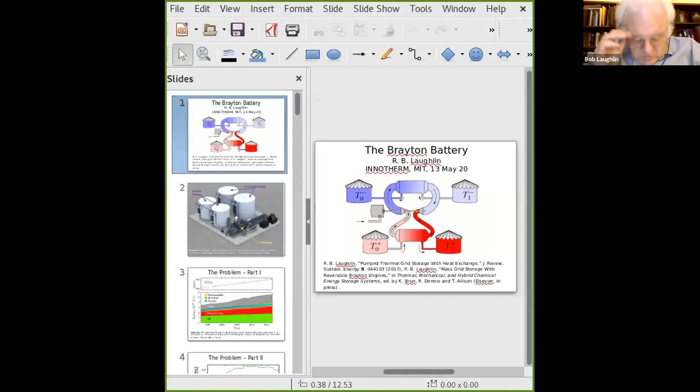Okay, so we're sharing here. Share. Okay, have we got signal? My own voice is not coming to me. So, Craig, you can communicate with me with hand signal. I can hear you, yes. Okay, yeah, we can hear you fine, Bob. I can't hear myself. Okay, great.

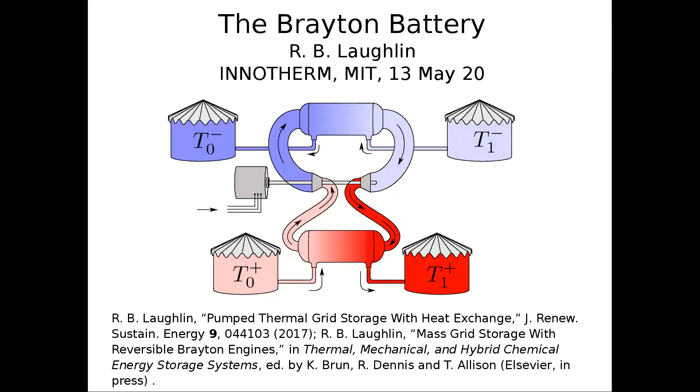I'm going to talk today about what's on the screen here. There are two relevant publications you see at the bottom. One is in press, the other has been out for a couple of years. Before I get deeply into this, I want to note that the publication date on the first one is 2017, but that paper was actually written in 2013, and it was embargoed. That whole question of privacy and secrecy and embargoing is actually very relevant to the bigger question we're talking about this morning.

So I'm going to talk to you about technological things having to do with how to store energy on the grid cheaply, in enough mass to have an effect on the economics of wind.

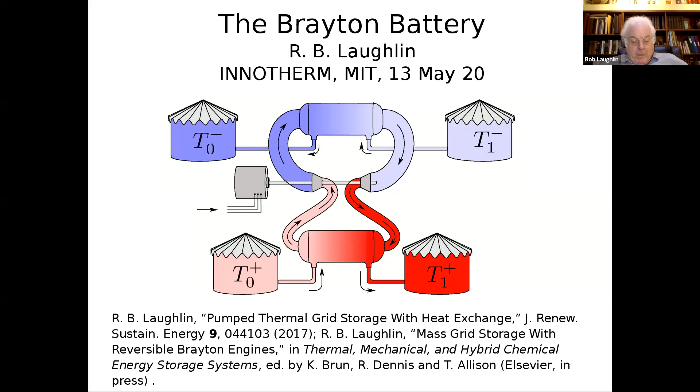This little item is an example of what it might look like. This is drawn courtesy of Brayton Energy LLC up in New Hampshire. I don't want to talk a great deal about it, other than to say this picture came out in 2017, which is not an accident. You'll see that yellow thing says heat pump—that's the engine. This particular version is bigger than it ought to be. The actual engine doing the conversion of energy is actually very small, and is separate from whatever is storing the energy. That separation between the engine and the storage medium is actually critical for the economics.

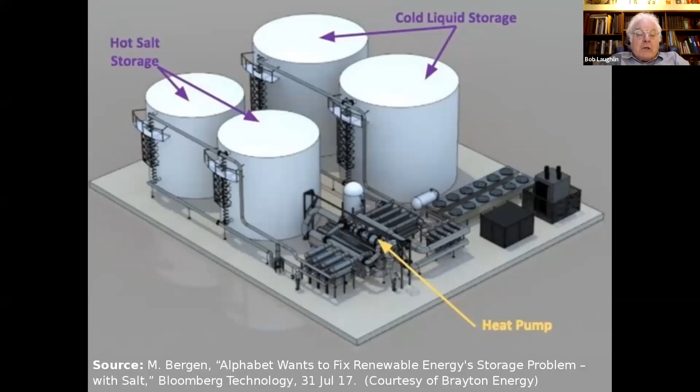Now let's begin by talking about what I call the problem. I'd like everybody to look at the bottom figure. That is the world energy budget in joules per year as a function of time, from the BP statistical review, converted from tons of oil equivalent by the usual factor. The key things to note are, first, that the total growth is monotonically upwards.

Secondly, the total renewable budget is that little yellow sliver there—that's all of wind and sun. Plus, it turns out it also includes corn ethanol, and that's important because the energy economics of corn ethanol is very problematic because of the diesel used in growing the corn. So actually, the renewable situation is even worse than that yellow sliver shows.

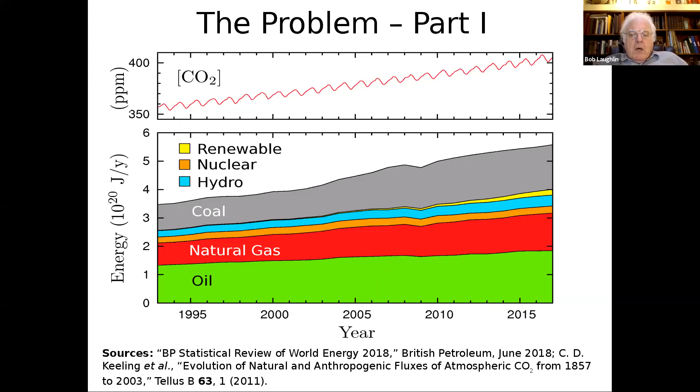So that means the Keeling curve is missing about half the carbon budget out of the Earth, and presumably that's going into the oceans, although you don't have direct proof of that. All right, so that's the energy carbon situation.

Now we get to electricity, wind, and this is what I call the problem part 2. This is a plot of the power budget of the state of California, the California ISO, as a function of time over 24 hours in some day in 2009. What you see here are 3 curves. The gray curve down there is a prediction made 3 days ahead of what the demand will be. The red curve is a snapshot of what the demand is in real time. You see it matches the curve pretty well. And then the green curve at the top is reserves.

So the reality of electricity today is that electricity travels at the speed of light and is not storable. So power companies make their business by anticipating what demand will be and then switching on generation assets onto the grid in time to meet that demand. And that's so sensitive that they have to have extra on hand just in case their theory's wrong.

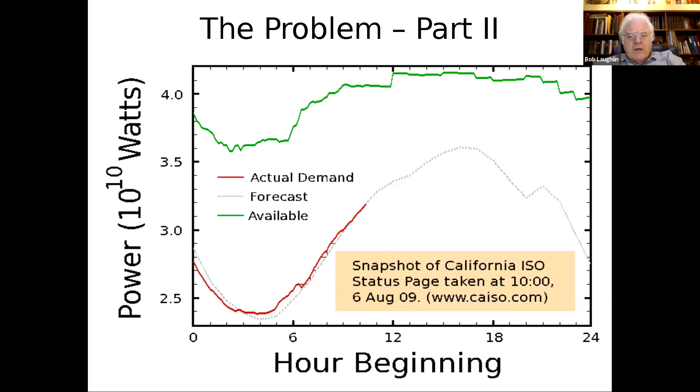Notice the magnitude of the slosh there is about 30%. Call it 20 - okay, it's because of where 0 is on the y-axis. So what I call the diurnal surge is about 20% for the electric grid between low use in the early morning and high use at rush hour.

As a result, wind assets often have negative value. This has happened in numerous parts of the world: West Texas, parts of Europe, definitely in China. The wind energy comes when it wants, and the fundamental problem here is that the power industry is all based on time. Power that comes when you don't need it is useless to the industry because the industry is busy switching on assets to balance the load. So negative value means the power is worthless - it's worse than worthless, you have to pay the grid to take your power. So this is telling you there's a business problem that's fundamental and has at its root the physical reality that electricity can't be stored.

Now you say, well, why not store it? There's a really interesting fact about the United States, which is that it has a huge amount of pumped hydro storage available, particularly in the Appalachians. And these are 2007 numbers. The amount of pumped hydro storage you have down at the bottom, that red 0.25, is 1/4 of the amount you would need to level the entire diurnal load of the surge load of the country.

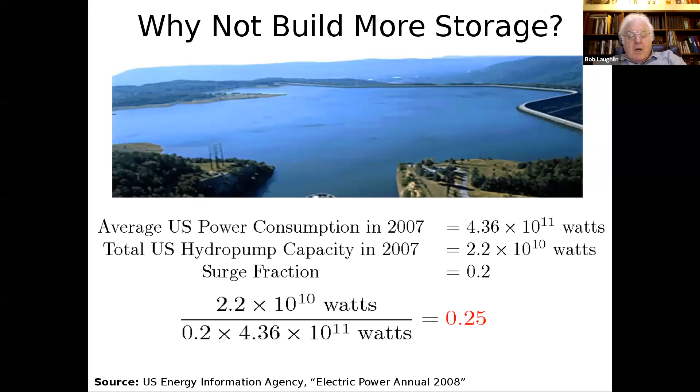So this was built chiefly in the 70s and 80s, and you might ask, well, just why not build more? Clearly, if you build 1/4 of it, you could build the rest. Well, that's part of the story. One reason, the lesser important reason, is that there's a danger factor.

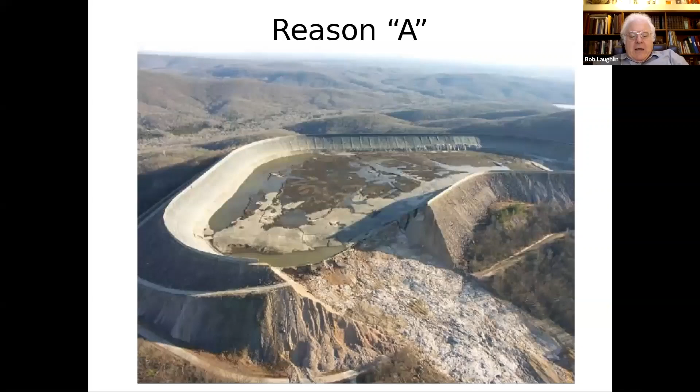This is a picture of the famous Taum Sauk breach, where - well, I think the picture is self-explanatory. The reservoir failed and there was massive destruction downstream of it. But the more important lesson is that the amount of energy we are talking about storing up the surge for a metropolitan area is an immense amount of energy. It's equivalent to a really hefty sized nuclear bomb. So that means when you're thinking about energy storage as a safety issue, it must be physically impossible for all that energy to come out at once, or you risk destroying the city.

So for example, storing all that energy in compressed air above the ground is kind of a non-starter. All it would take is one terrorist bazooka round lobbed into the middle of the tank farm and no more city.

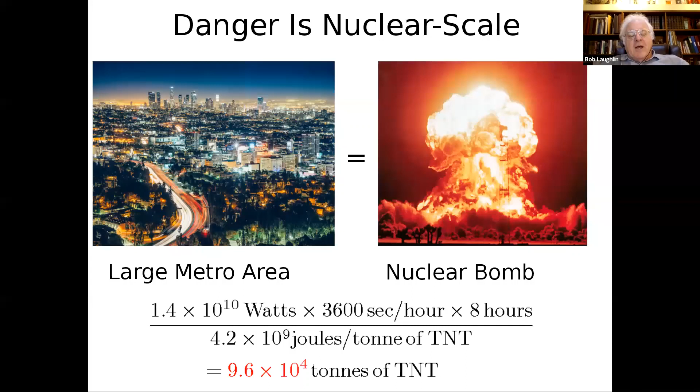The much more relevant reason is this: in the late 1980s, aeroderivative gas turbines got to be very, very good. And the power industry discovered it could handle that surge much more readily by buying cheap gas turbine generators, simple cycle gas turbine generators, and just switching them in and out of the grid as the needs of the load required. And this is the way it's done today.

So when this technology came on board, construction of pumped hydro stopped. In other words, what stopped the construction of the remaining 3/4 of the pumped hydro you would need to level the load is economics. Basically, the gas turbines were cheaper, there was no hassle with the government over land and no water to deal with, and they're faster. So there's a technical/cost issue right at the breaking point of where power companies make their profits.

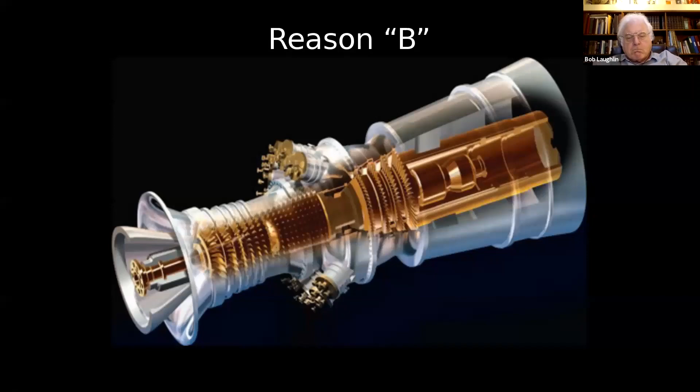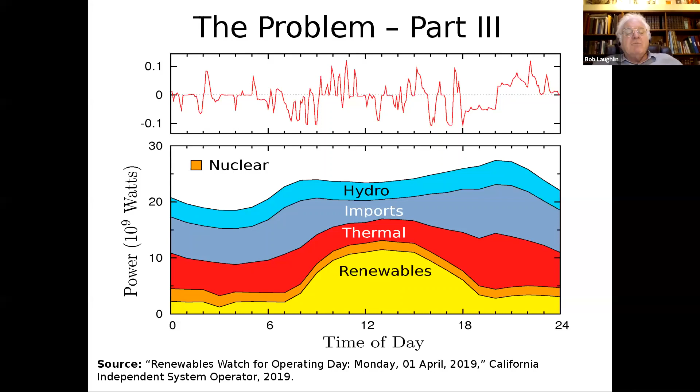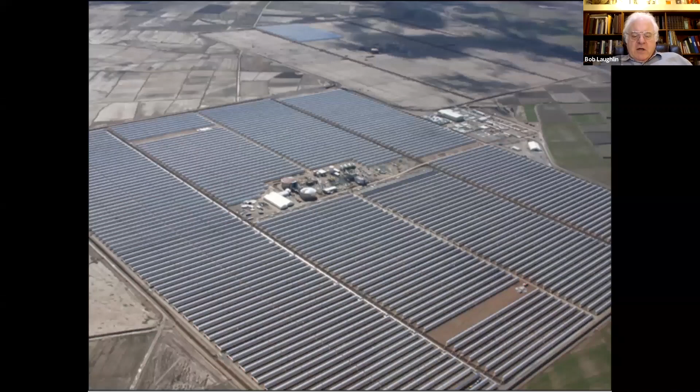Here's a close-up of it. What I want you to do now is focus in on the center there, and in particular those two brown tanks. The center is where the engine is for this solar farm. And there it is. You see in the background we have parabolic reflector collectors, and in the foreground there are two tanks, and these tanks are filled with molten nitrate eutectic where heat is stored. So Andasol 1 was the first commercial plant that stored heat, energy in the form of heat collected from parabolic fields, in molten salt.

Now, this was not the first deployment of molten salt storage. That first deployment was at Solar 2 in Barstow, California, but this was the first commercial one. And because it was commercial, there was a lot of buzz in the finance markets about what the costs were. And because of this buzz, you can go back and look and verify what the costs were, and see that they're actually remarkably reasonable. The fact that the plant was built also proves this, but let's just say there's more evidence than just that it was first.

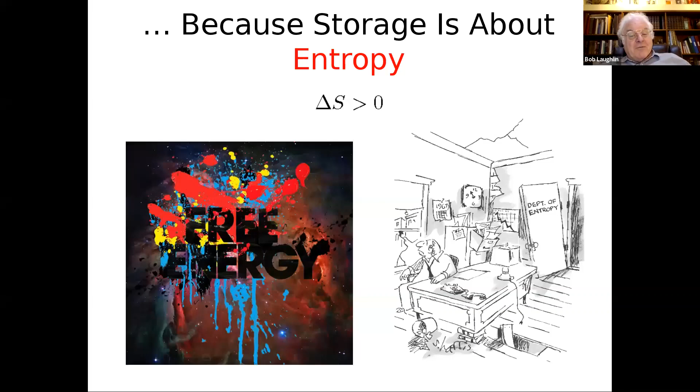Now, the key observation here is that modern gas turbine technology has become very good, and gas turbines are basically just a bunch of fans. Disregarding the burning of fuel for a moment, the actual compression and expansion that occurs in modern gas turbines is very, very efficient. They make shockingly little entropy, and therefore you can imagine running them backwards. This is running them backwards figuratively. There are blade shape issues that you have to worry about, which I'll come back to later. But insofar as there isn't any entropy being made, you can simply run the movie backwards. So you're producing energy, you stop the projector, run it backwards, and you're storing.

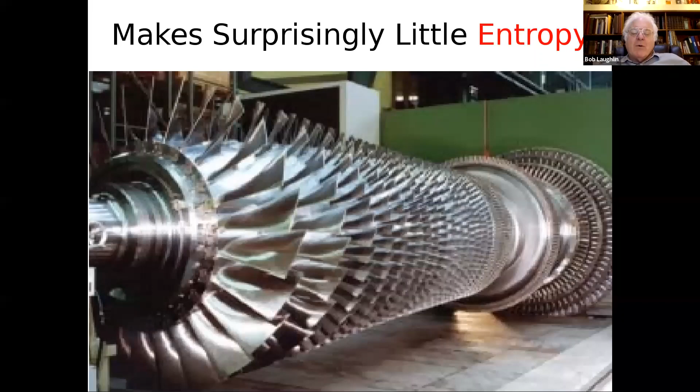Now, let me remind everybody about a few basics of gas turbines. Here you've got a jet engine, some air is coming in, there's some fire, air is going out, and you get power out. Then you ask the question, well, how come energy is coming out? What's the difference between the compressor and the turbine?

Turns out very few physicists know the answer to this, so I'll tell you. It's the temperature difference. So the key trick is that it's much hotter at one end of the chamber than the other. The work done in the turbo machinery is PDV, it's the DV, the volume is different on the two sides. So the trick is you keep the temperature unbalanced and then maintain that temperature imbalance with a stupendous flow of moles of gas through the turbine.

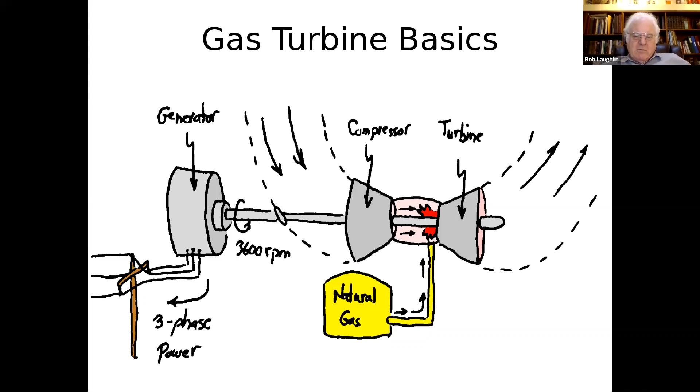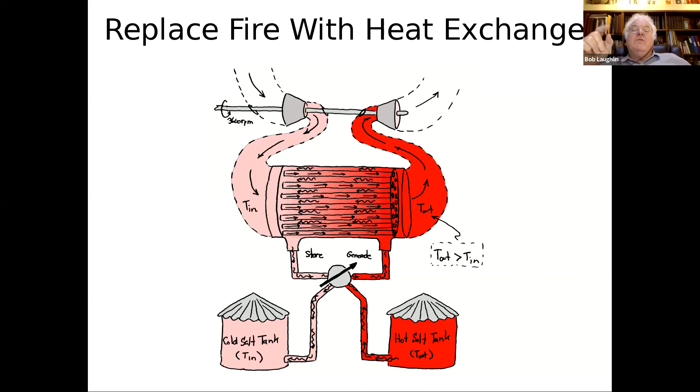Now let's advance a little bit and get rid of the flame, and put instead the moral equivalent of a locomotive boiler in there. Then do exchange with some sort of heat fluid. As far as the turbines are concerned, nothing has changed, they work exactly the same way. But now you have heat being transferred inside a heat exchanger such that the temperature difference over which it's transferred is very small. And if you do that properly, you can cause the amount of entropy made to be very small.

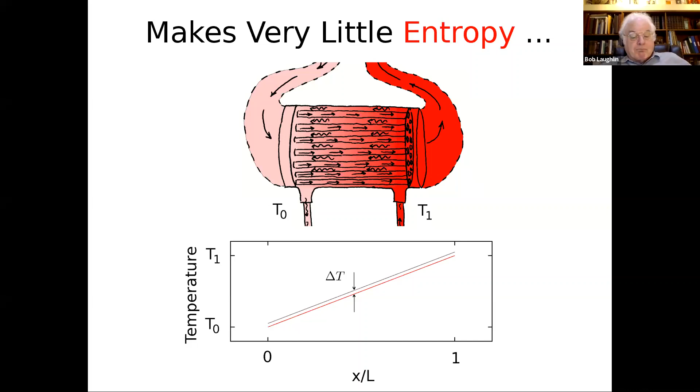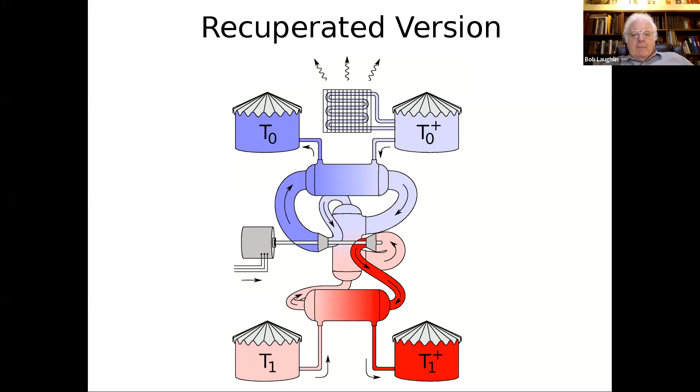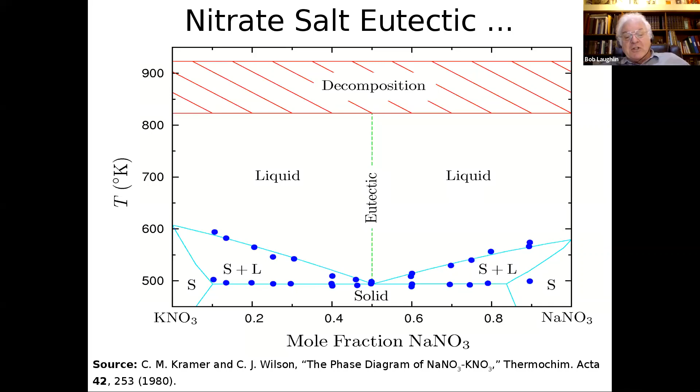Now, it turns out that the storage medium deployed in the Spanish solar plants is fabulous. I'd like to call your attention to that vertical green line there. That's the temperature range over which it works. And it turns out that that temperature range is large enough that phase transitions don't matter. In other words, equipartition is guaranteeing that the amount of heat stored per atom is very large. And in fact, you don't want phase transitions to occur here because they're entropy makers. So this is an application where phase transitions in the medium would actually be bad.

This temperature range turns out to coincide exactly with what's called the creep cliff of the steels in question. And this means that there's a fundamental compatibility with the engines. This compatibility is also manifested in modern day supercritical steam plants, which is why they have the temperature ranges they do. So the temperature scales of these salts turn out to be just perfectly adjusted for cheapness and compatibility with materials.

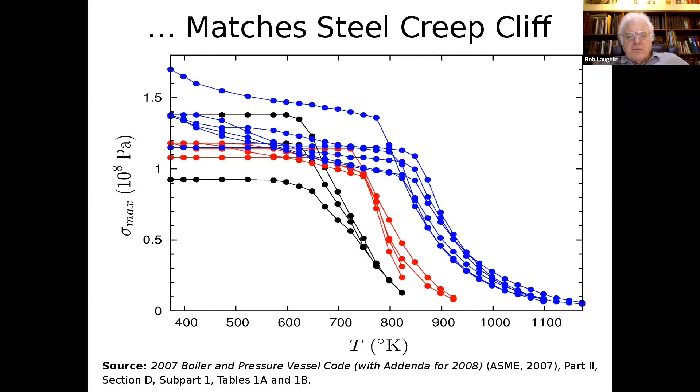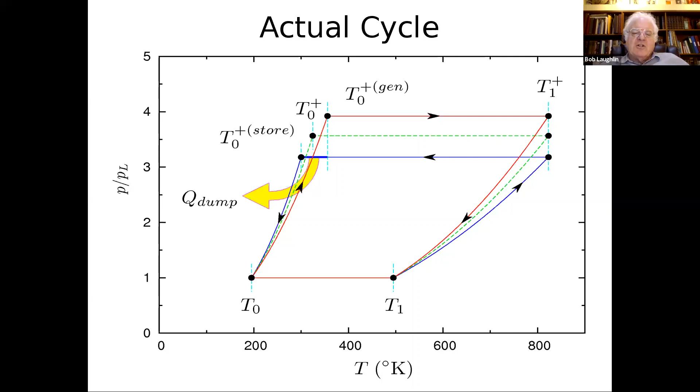Okay, so with the extant gas turbine blade technology that one has today, we're talking about an asymptotic round trip efficiency of about 0.7. That is enough to make money.

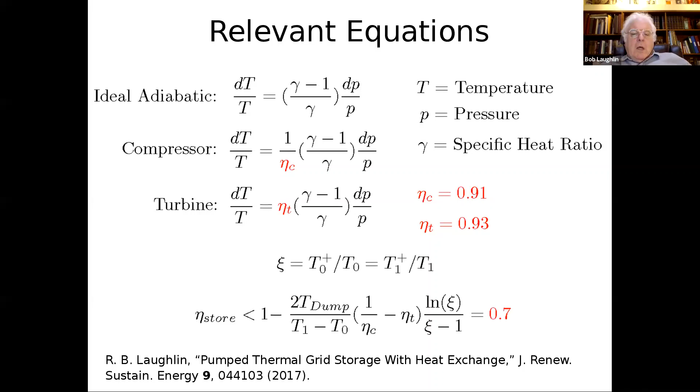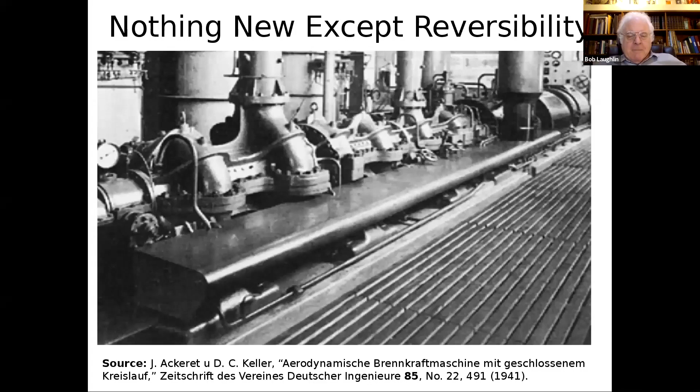So you ask, what do you have to do to solve this problem? Well, what you have to do is get a whole mess of patents, so the money people can put their money down. So this particular technology I am banking on, because it does what you need with the efficiency you need, with the economics you need.

So we don't have a siting problem. You don't have to put the compressed air underground in caverns. Why? Well, because this technology is compressed air energy storage, except you do a secondary expansion first, so you don't have to put the compressed air underground. And anyway, we all know when you compress a gas, the energy is actually stored in its heat. So there are heat issues with caverns that you just get rid of when you don't have the underground cavern.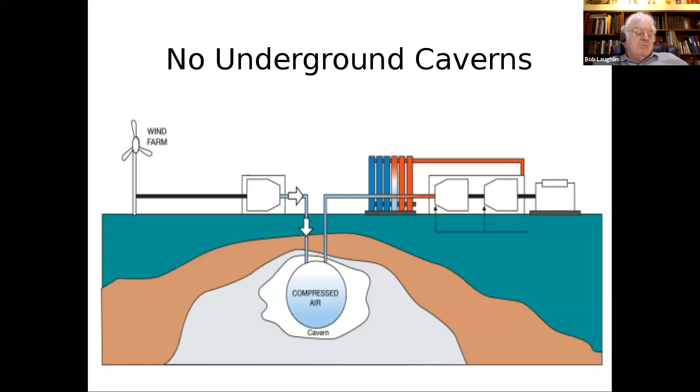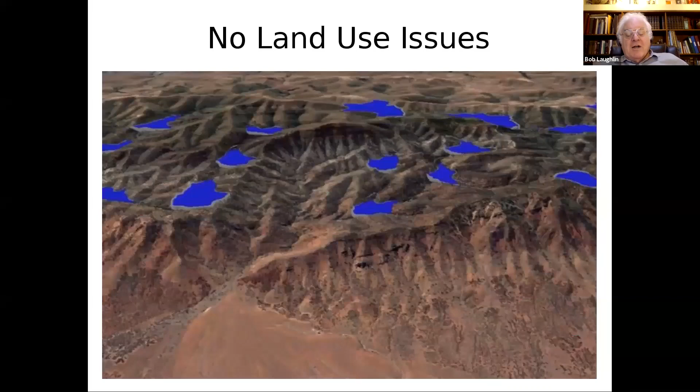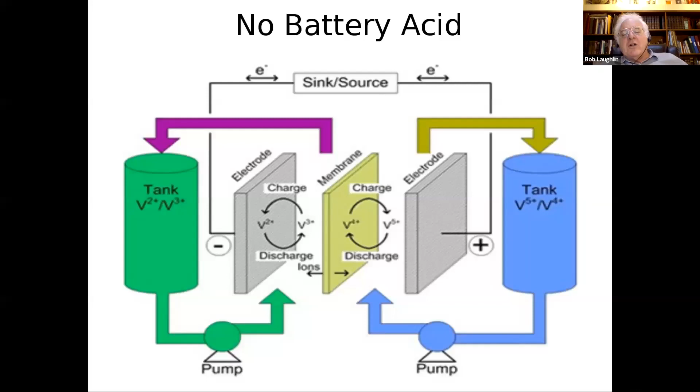Because everything is at 1 bar, explosion is physically impossible. So the atomic bomb danger of energy is gone. All the problem of using public lands goes away because you don't have to make lakes. The footprint of the technology is quite small. Environmentally, you're in good shape. You don't have any pH2 stuff in giant tanks. You have just a bunch of salt, and if there's a breach, what happens is fertilizer goes all over the ground. And finally, no semiconductors.

So as I said, I'm a semiconductor man, and I understand the physics of what's going on with the grid well enough that I know that you don't want semiconductors. The grid is set up for mechanical motion, like these horses, except it's electrical mechanical motion. And so faking it with semiconductors is actually bad and results in losses. So we get rid of the semiconductors and we're back to good old mechanical grid.

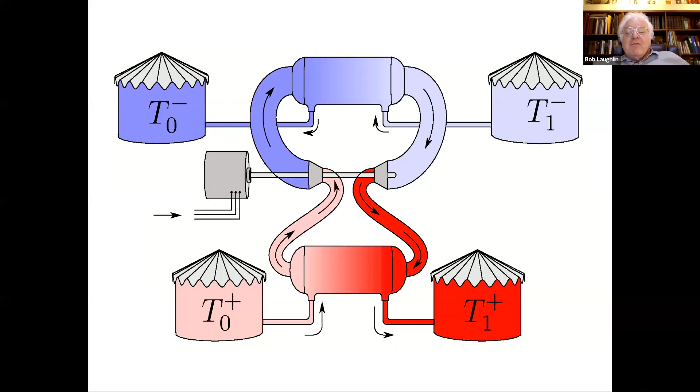We're done, and I'm on time, everybody. Thank you for your patience. I hope you were entertained.

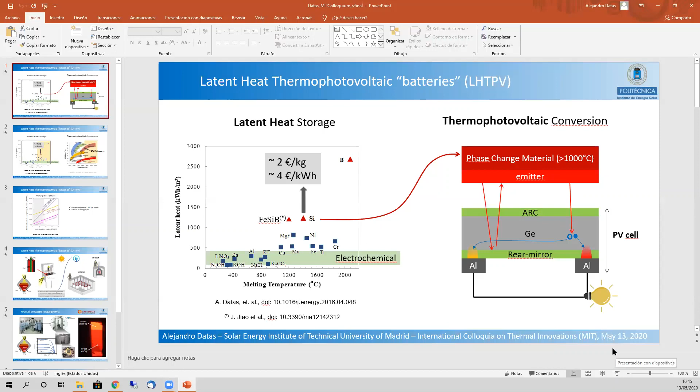I've got a couple slides, I think, Alejandro, and a summary of what you're working on. Yeah, so you're going to share slides, or I should? Do you want me to show the slides? No, okay, I will go for it. Yeah, share your screen to be easier. Okay. Okay, good, I hope everyone can see this screen. Yes, okay, perfect. Okay, so thank you very much for the introduction.

I will briefly, in just 5 minutes, introduce this concept of what I call the latent heat thermophotovoltaic battery. As the name says, it has mainly two parts: latent heat storage and thermophotovoltaic conversion.

For the storage part, I want to emphasize the role of the phase change material, which basically stores energy when it changes from solid to liquid phase. Here I show the latent heat of these materials as a function of melting temperature. You want a high latent heat because this means high energy density capacity. What you can see here is that generally when you increase the melting temperature, you also increase the latent heat, so the energy density capacity.

With some exceptional cases, like silicon or boron, or even this new phase change material that is an alloy of iron, silicon, and boron, they provide remarkably high latent heats. That's basically twice the energy density of electrochemical batteries, illustrated by this bar. Besides that, you have a very low cost because it's just metals. In the case of silicon, for instance, you have two euros per kilogram, which translates to €4 per kilowatt hour. So it's really a good way of storing energy.

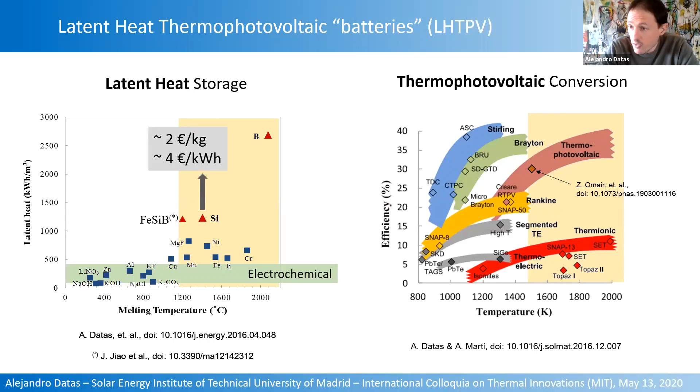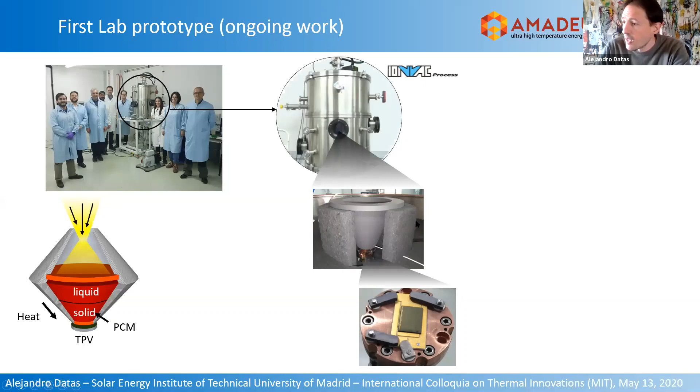This is an illustration of one of the embodiments and the prototype that we have just built. So in some details, you can see here the crucible, and here the photovoltaic cell. This is a gallium antimonide cell, just underneath the crucible. And here, one example of the system in operation with a hot crucible radiating to the photovoltaic cell.

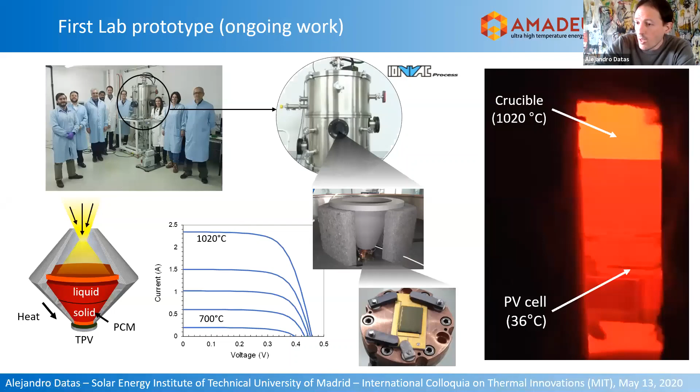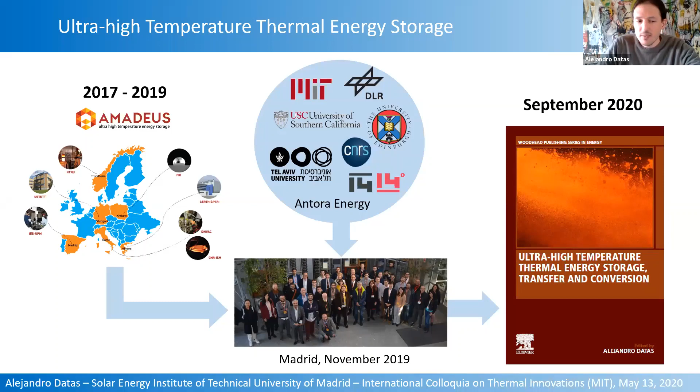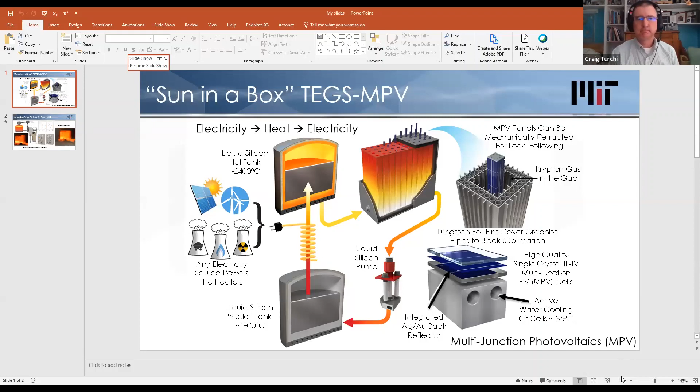Thanks, Craig. So this is just a quick cartoon overview of the embodiment that my group is pursuing. In short, we take in electricity agnostically from essentially any source. We are in the regime where we're trying to push the temperature limit.

So you can imagine an entire infrastructure shrouded in an inert gas, everything stays in an argon atmosphere, and that opens up the materials options for what you can use. So we are using an essentially all graphite infrastructure that allows us to go to extremely high temperatures. We're essentially doing 2-tank thermal storage, but our low temperature is actually like 1900 degrees C, so our quote unquote low temperature. And the high temperature is like 2400 degrees C.

So we take electricity off the grid, heat up the medium. In our case it's actually liquid silicon, similar to Alejandro's case, but instead of using a phase change, we're actually using it as a sensible heat medium, stretching it over a delta T of about 500 degrees C. We heat up the liquid silicon, store it in a hot tank, and then when power is desired, run that through a heat engine, which again, similar to Alejandro's case, is photovoltaic cells.

So instead of trying to run turbo machinery at these temperatures, which would be exceedingly difficult, instead we go so hot that we can actually just convert the light off of the piping infrastructure itself. These cells, of course, are made in a very different way than normal PV cells. These are cells that have a mirror on the back, so the majority of the light we don't even attempt to convert. We only focus on the photons that we can convert very efficiently.

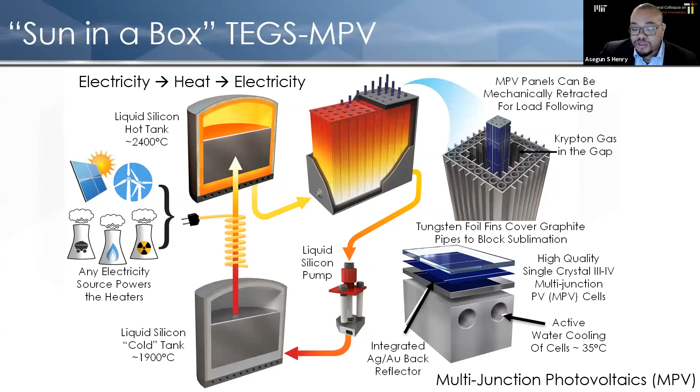One of the biggest contributors to us pursuing this approach has been a significant breakthrough that we've had specifically on moving that fluid. We've managed to figure out how to pump liquid metals at extremely high temperatures. This is a small excerpt from a video from a paper that we published in Nature a couple of years ago, where we pumped liquid tin at about 1350 C.

We have pumped silicon above 1900 degrees C now as well. Papers on that are forthcoming. But basically, we can now move liquids at extremely high temperatures, which now allows us to do new and interesting things. And this particular energy storage system is one of them that we're very interested in pursuing.

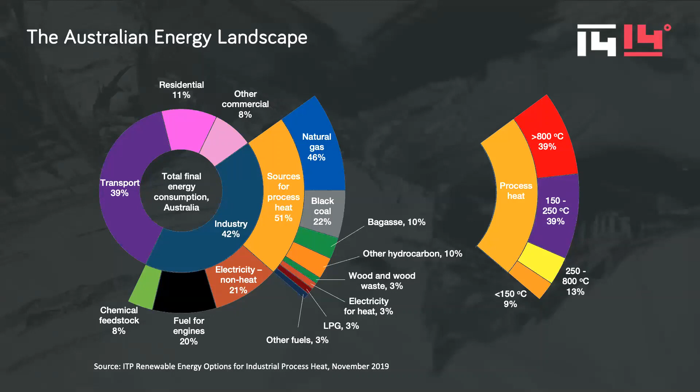If we talk about a futuristic renewable economy where all our grid systems are renewable and we've electrified most other energy industries, it's still very hard to electrify processes above 800 degrees C. So there's a need for green process heat at higher temperatures. That's where I want to couple with the earlier presentations, because we want to store heat at higher temperatures, but if we store it hot enough, we could use it as a mechanism for providing this green process heat as well.

So what we're trying to do is quite simple. The 1414 TESS box you see on the left is our energy storage unit. We use phase change in metallic alloys based on silicon, which have melting points between roughly 1000 and 1400 degrees C. As Alejandro showed, the storage density of these silicon-based materials is quite attractive, much higher than electrochemical systems can achieve.

We are agnostic to how we charge this thermal storage system. In our two demonstrator units, we've shown we can charge it with ohmic resistance from grid electricity, or using biogas. Our second demonstrator unit is installed in a wastewater treatment plant that produces biogas, which is used to heat our TESS system. That heat is basically an energy cascading system providing heat at ultra-high, medium, or low temperatures, which can then be converted into electricity by running a gas turbine or combined cycle, or can provide process heat.

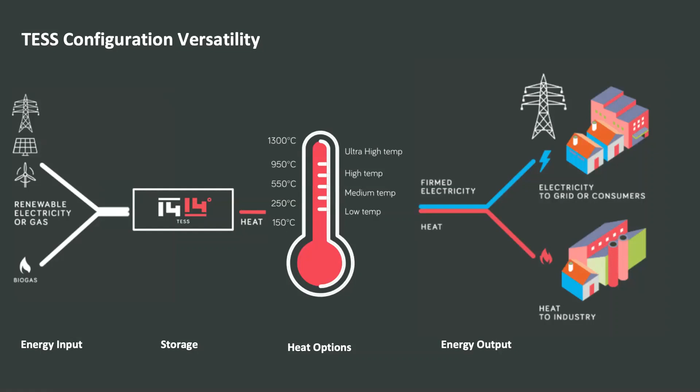Some examples of process heat applications we're aiming for are ultra-high temperature processes like hydrogen production using thermochemical routes, iron and steel, cement, and alumina industries. In the high temperature region is where we run our gas turbine or combined cycle. And at the low temperature end of the spectrum, there's a lot of process heat need in the pulp and paper, food, and brewery industries. So that's the energy cascade we're looking at.

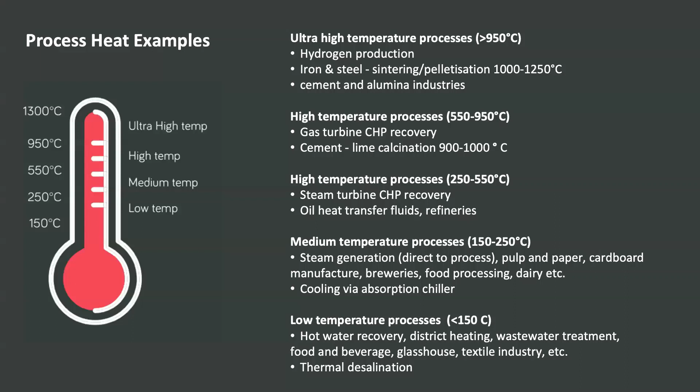What we're trying to do differently from what's been done before is that mostly the energy recovery systems or heat recovery systems for power plants were aimed at the bottom end of the spectrum. We want to do it where it's more exergetically attractive. That's all I have, thank you.

Thank you, Mahesh. So our final panelist today is Andrew Ponec, and we've heard about some of the high temperature storage opportunities. Andrew's going to talk about a little bit different range, I believe.

Absolutely, thanks. I have the benefit of going last, since everyone else has described many aspects of this system quite well, so I just have a single slide to go through what the team at Antora Energy is commercializing. This has some similarities to what Alejandro and Ash presented on. It's a thermal energy storage system using thermophotovoltaic cells as the engine to convert that heat back into electricity. The main difference is that we've heard descriptions of storing energy in the sensible heat of a liquid, for example in molten silicon, or in the phase change between liquid and solid. Antora is commercializing an all solid system. We simply use solid carbon, which has the benefits of very low materials cost and high energy density that Alejandro mentioned, but has the advantage that without a phase change, you have some simpler things on the system side.

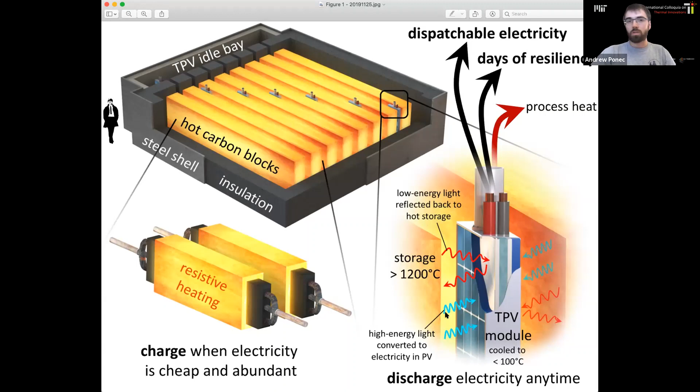Again, it's direct ohmic heating of the carbon as the charging process, and a thermophotovoltaic cell as the discharge process. One of the things Bob mentioned was limiting entropy. I think Bob's system does a very good job of limiting entropy generation by using a heat pump. Another way to limit entropy generation is to store the heat at such a high temperature that the conversion from electricity directly into high temperature heat is not generating that much entropy. So this is what Antora is commercializing. That's all I've got.